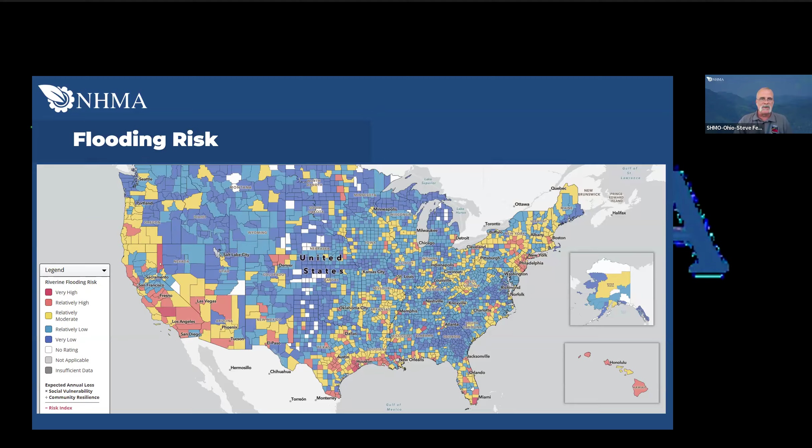Flood risk is a national concern, but varies locally. Every region has some degree of riverine flood risk, though the severity differs by county. And even moderate or low risk areas are not risk free. There's a statistic that people familiar with the National Flood Insurance Program hear all the time, that 30% of the claims every year come outside of mapped flood hazard areas. So just because you're not mapped in the FEMA floodplain doesn't mean that you're risk free.

Since 1980, we've had over 45 $1 billion inland flooding disasters, and those numbers just keep going up and up every year. What we're trying to do through mitigation is to break that cycle of constant damage repair and damage repair. Sometimes these events can turn very deadly.

Just last July, 4th of July weekend in 2025, we saw the Guadalupe River in Texas rise up 40 feet in a few hours, and unfortunately claimed the lives of a number of campers at Camp Mystic campground there. So flooding can be deadly and the consequences can be great.

Frequency and magnitude. Extreme rainfall is increasing, and I kind of feel silly saying this right now because in the state of Ohio, we've just endured two weeks of solid rain. Our emergency operations center is activated right now. We had flooding in my neighborhood last night. So you don't need a lot of convincing for me that extreme rainfall is increasing.

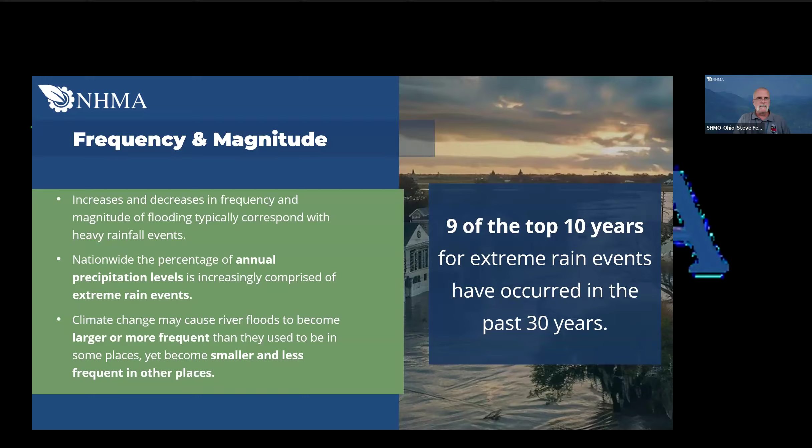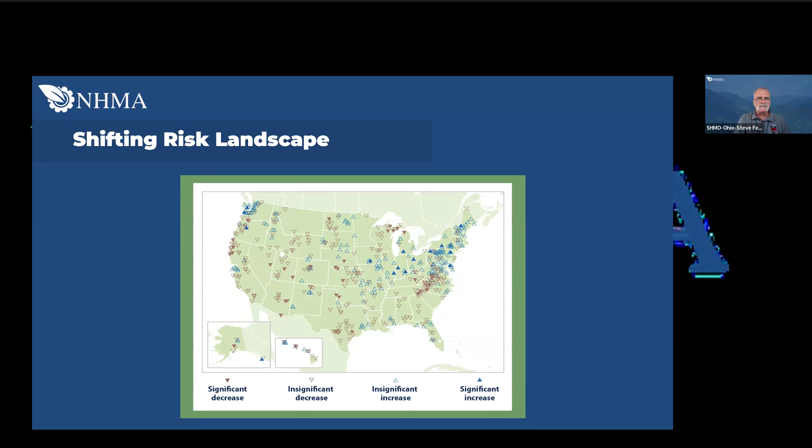So some key terms and concepts that we need to know as we move forward and talk about the NFIP and flooding related issues, and how that builds into an eventual mitigation project.

So what exactly is riverine flooding? Flooding occurs when runoff from heavy rain, snowmelt, or rain on snow exceeds a stream's channel capacity, overtopping the banks of the floodplain. The timing of flooding is going to vary by basin size. Flashy or small streams can respond within hours, whereas large rivers may take days or even weeks to crest. Depth, velocity, and duration control the severity of impacts and the appropriate mitigation options.

So what are some of the causes of flooding? Well, rainfall, right? That's one.

But there are others, snowmelt for instance. Our friends out west have a lot of mountains, and they get a lot of snowpack in the winter. That comes when it starts to melt in the spring. Add a little bit of rain on top of that, and you've got problems. Same with the Midwest. Some of our largest floods in the state of Ohio happen in the spring when we have frozen ground and a solid snowpack, and then we get rain on top of that. It's a sure recipe for problems.

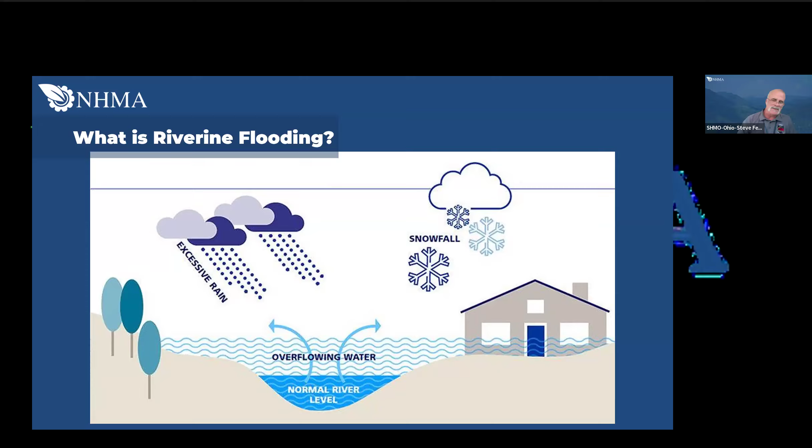But you know, things that people always think of—severe thunderstorms, hurricanes, tropical storms—all of those things can lead to serious flood events. Next slide, please.

Some common flooding terms. We'll start with floodplain. Floodplain is any land area that can be inundated by floodwater. This usually includes the river channel and the broad low-lying areas next to it.

Floodway, when you talk about FEMA flood mapping, is the area usually adjacent to the stream, where you can have the fastest moving floodwaters and the highest potential for debris and projectiles. So it's often the most dangerous part of the floodplain, and development there is restricted with minimum NFIP requirements.

Discharge is the volume of water flowing in a river per unit of time, typically expressed in cubic feet per second. A higher discharge means there's more water coming down the stream. River flood severity is often described by both stage, which is height, and discharge, which is the flow rate.

Hydrograph is a graph of river stage or flow over time—we've got a slide showing an example of that in a few minutes. It basically shows how a river rises and falls during a flood event, with the horizontal axis being time and the vertical axis being discharge.

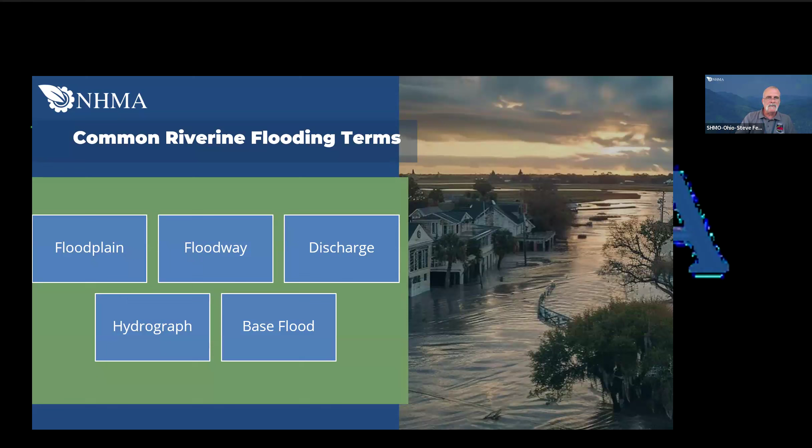Buoyant force is an uplift that can cause a structure to float, to come up off of its foundation and float downstream. Hydrostatic force is a force exerted on a structure from still water—like where you have water on the outside of the house but the inside is dry, which puts a lot of pressure on those walls and can cause walls to collapse and fall in.

Hydrodynamic force is a force from the water flowing by a structure, which can cause scour and push on walls. That's the type of force you're going to have in that floodway area, the area closest to your stream. Debris impacts also occur there because it's the fastest moving water, so you get the highest potential for floating trees, vehicles, and manufactured homes underneath bridges. It's really crazy what water can move and push downstream.

Water damage and contamination: even after floodwaters recede, they are not clean. It's not like the water that comes out of your tap, it's got gross things in it. If you leave that uncleaned, it's going to cause long-term problems like mold and other issues.

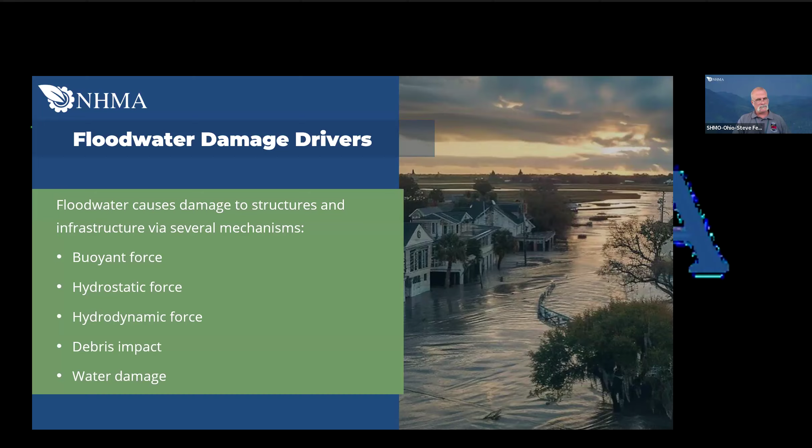The next stage is minor flooding. There, the river is out of its banks, usually affecting low-lying areas near the river—crops, parks, things that, if flooded especially for a short term, aren't hugely detrimental, but are still, by definition, a flood nonetheless.

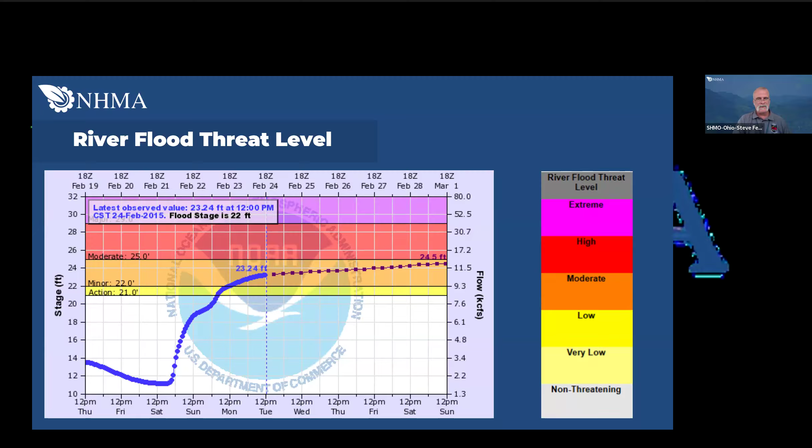Let's talk about the National Flood Insurance Program. It was established by Congress in 1968 to address the continual cycle of flooding. Insurance companies didn't want to take on the risk of providing flood insurance, because if your pool of coverage is in a certain area and that entire area gets flooded, you'd go out of business. So the federal government stepped in and created the NFIP.

The NFIP in a nutshell: the community agrees to adopt and enforce floodplain management regulations, and in return the federal government makes flood insurance available to anyone in the community who wishes to purchase it.

New development is supposed to be permitted through the local floodplain management office and comply with the minimum standards of the NFIP, usually meaning the lowest floor of the structure is built above the flood level. As older structures get flooded and substantially damaged, they were supposed to be brought into compliance as the program continued through the years.

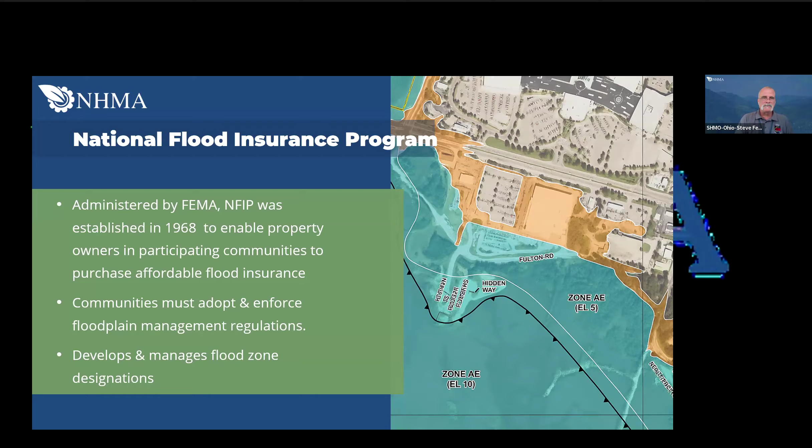The main tool the NFIP uses to identify areas where local floodplain regulations apply is the FIRM, the Flood Insurance Rate Map. It's the official map of a community, defining both the special flood hazard area and the flood zones applicable to that community. The map is used by the NFIP for floodplain management, mitigation, and insurance purposes, and it's the official source for determining flood risk within the community for NFIP enforcement purposes.

The term special flood hazard area is synonymous with the blue area on the map, which is the A or AE zone. Any zone on a FIRM that begins with A is a 100-year flood zone, or V in coastal areas.

Don't ask me why they picked V instead of C, but it's a V zone if you're in a coastal area. I think because the old maps actually had a zone C, but again, I'm not going to let Tom make more old jokes about me, so I won't get into that.

The key takeaway here is that the FIRMs define where the special flood hazard area is and the BFE that must be designed to when developing HMA project applications. In recent years, FEMA has required that HMA projects be designed to comply with ASCE 24 criteria, which includes freeboard and other standards more stringent than the minimum NFIP requirements.

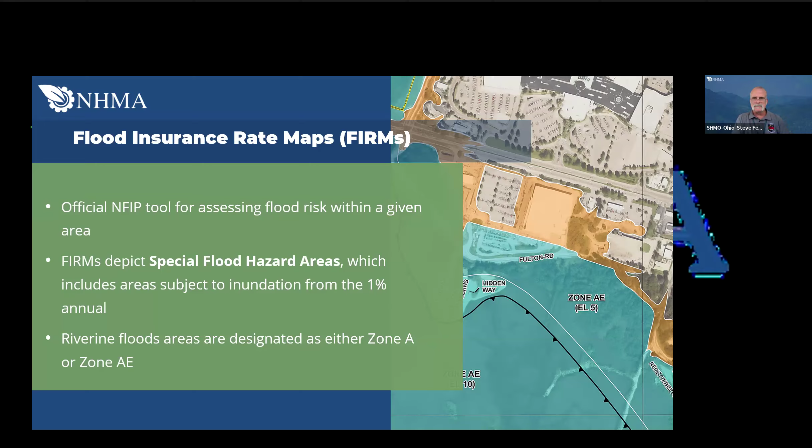Next slide, please. Assessing, all right, go ahead Tom. Yeah, go ahead, I think this is where it starts, Steve. Or no? You can, oh go ahead. Keep driving it. Okay. Time check. All right, next slide. I think we're a little bit behind schedule, so we'll move a little faster if we can. I can move it right along. Sure can.

Okay, so elements of riverine flood risk. Three major terms here: hazard, basically what can happen and how often and intense is it going to be. Exposure is all about who and what is in harm's way. And vulnerability is how bad is it likely to get, or how bad are things going to go.

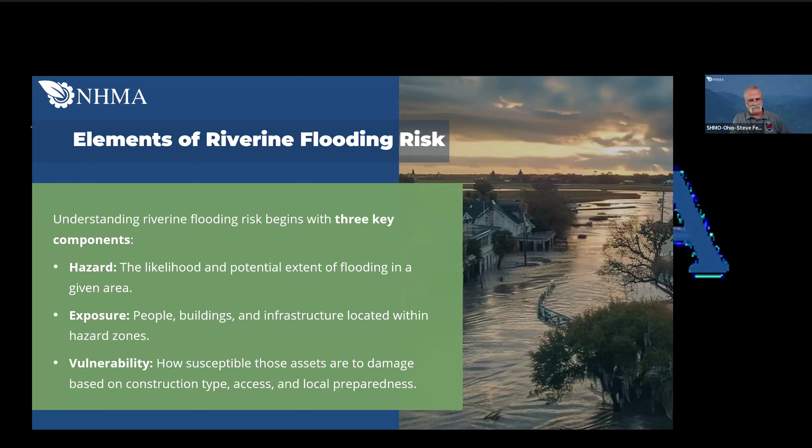When you take a full look at the riverine flood hazard, you're going to be looking at a number of things. It's not just how much rain fell and how quickly and where it fell, but what are the parameters of your watershed? Is this a small watershed with steep valleys that's going to flash flood? Is this a large flat watershed that's going to take time for the river to rise? Is it a fully urbanized area, again more flashy type flooding? Or is it a large agricultural area with a lot of wetlands? It's going to be slow. The watershed's ability to absorb water, the obstructions along the water course, how many bridges, culverts, crossings do you have? All of those things are going to contribute to the extent and magnitude of the flooding.

So exposure: who or what might be impacted? Well, again, we talked about populations. Clearly, flooding impacts residential structures, businesses, critical facilities, wastewater and water treatment plants, electric. The first priority after a major event is to get that power back on because that's going to drive your recovery. Infrastructure, how many roads and bridges were impacted in a particular event? So mapping those using GIS, if possible, is really critical because exposure mapping turns where flooding is expected into what, who, and what must we protect first.

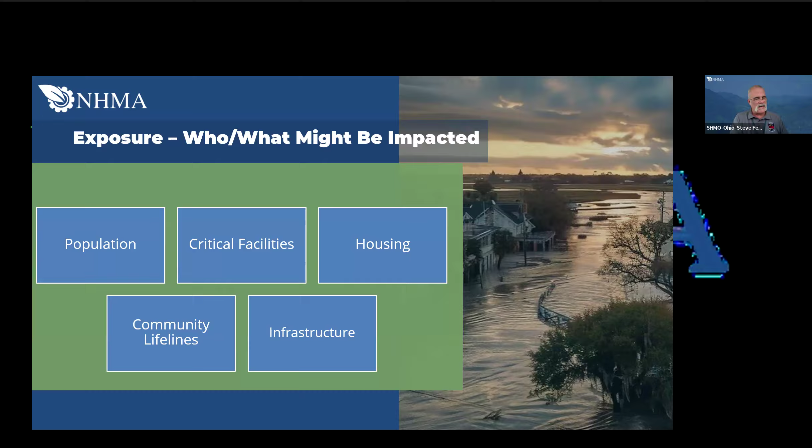Next slide. Okay, we're a little bit behind, so I'm going to jump to my last slide here, Tom. And what I want to...

Tom, I'm going to turn it over to you. Thanks, Steve. Yeah, I can't stress enough the same for the hazard mitigation plans—you can't get into the game unless you have the hazard mitigation plans current, with actual mitigation actions identified, particularly in this case for riverine type projects. So I'm going to be talking about that on the next following slides.

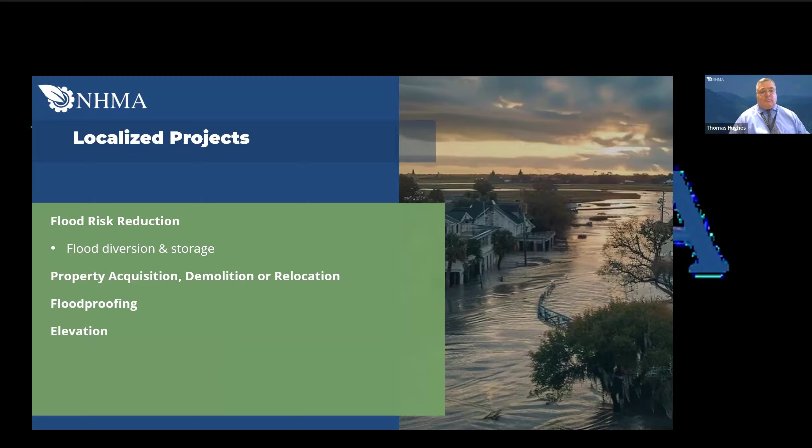As far as flood diversion and storage, I want to point out the bypass and diversion channels and temporary or permanent storage areas, channel basins, reconnection to floodplain and wetlands, and reduction of river stages and peaks. This definition is important: projects that redirect floodwater or temporarily store it to alleviate downstream flooding. This includes constructing or enlarging detention basins, dry ponds, or overflow channels, as well as creating diversion canals or overflow corridors that channel excess river water into designated storage areas like wetlands or fields.

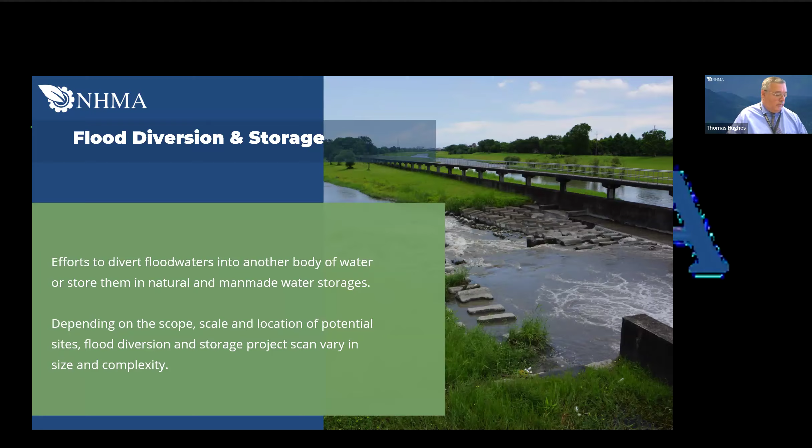Why is this relevant to riverine flooding? By giving floodwaters a place to go, these measures lower the peak flows and water levels in rivers and streams during storm events. Diversion and storage reduce stress on downstream channels and levees, protecting communities by cutting off the flood peak. Diversion and storage can measurably lower flood peaks when properly sited, modeled, and operated.

Property acquisition, demolition, or relocation—I would also add that we need to look at elevation, which I'll talk about later, and mitigation reconstruction. We have a slide on elevation coming up. This is the permanent removal of flood-prone properties by purchasing the property from willing owners and clearing its structures.

In a property acquisition, structures are torn down and the land is converted to open space, often a community green space or natural floodplain in perpetuity, which can be troubling for some communities because we've used FEMA dollars, state dollars, and other non-federal share to cost share for that parcel. There are only certain things that property can be used for due to deed restrictions. But again, this type usually gets your risk down to near zero, if not zero.

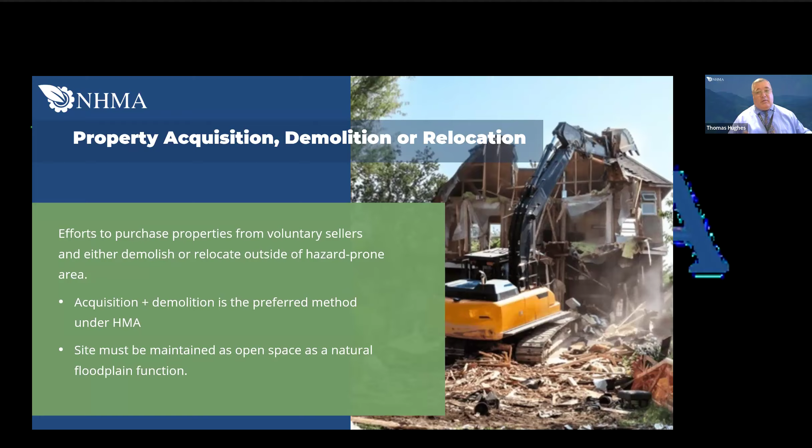Floodproofing—we're seeing this used particularly with businesses and historic structures. We could have floodproofing that's dry versus wet, or even a combo. Dry floodproofing could be impermeable walls, shields at openings, anchored equipment, seepage control, or sump pumps. Wet floodproofing consists of the use of flood damage resistant materials and construction techniques to minimize flood damage to areas below the flood protection level of a structure.

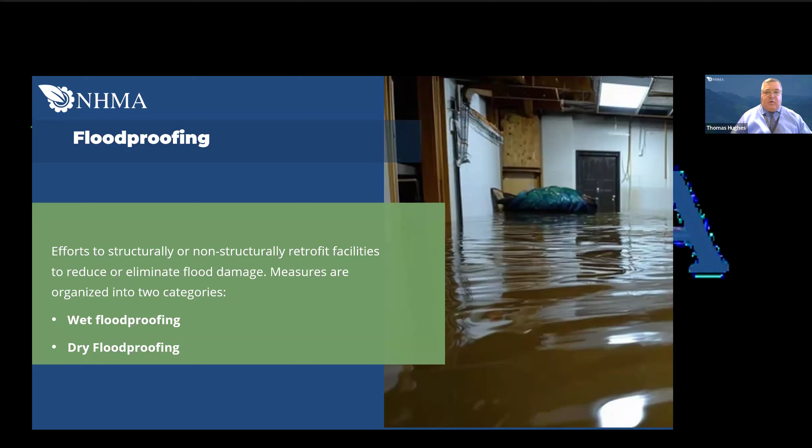This is relevant to riverine flooding because floodproofing can protect structures in floodplain areas where moving or elevating them isn't feasible—it's like a flood fight where the structure is. I've seen it in schools too, where we've done a combo of dry and wet floodproofing, and for critical facilities. One of my favorite projects was working with the Corps in the Pittsburgh district and Etna Borough, where they were close to the river. They did dry floodproofing for openings and the steps leading into the critical facility, but also mucking out—they were able to use some materials there for wet floodproofing.

Structural elevations—communities need to look at not just elevating structures like in this picture, but also mitigation reconstruction, where within that same footprint you build a code compliant house. We affectionately call it demo rebuild instead of mitigation reconstruction. That's not a technical term, but as I explain it to locals, it's a lot easier for them to understand.

For elevation, we need to raise the existing building so its lowest floor is above the flood level that Steve had talked about, the base flood elevation. The structure is lifted and placed on a higher foundation—extended foundation walls, piers, posts, columns, or fill—while ensuring it remains stable and properly anchored, and all utilities and service equipment, like HVAC and electrical, are also elevated.

This is a code compliant structure, but it's got to be monitored. And the number one thing from an operational side is folks with an elevated structure think that code and that elevation is for them as well. It's not. It's for the structure.

When we in emergency management tell folks to leave, it's time to leave. It doesn't mean you're going to ride this one out in an elevated structure, because we all know things can happen where the elevation can happen at a higher rate.

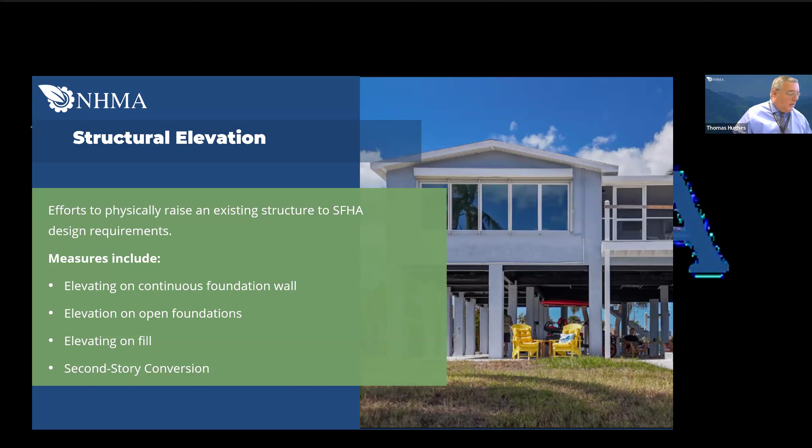Then non-localized reduction measures. These are actions or projects that lessen the frequency and severity of flooding and decrease predicted flood damage within an area hydrologically linked to a drainage basin that is regional in scale. These non-localized project groups, systems, or options are dams, levees, and restoration. Each affects risk over a broader footprint than, say, a parcel.

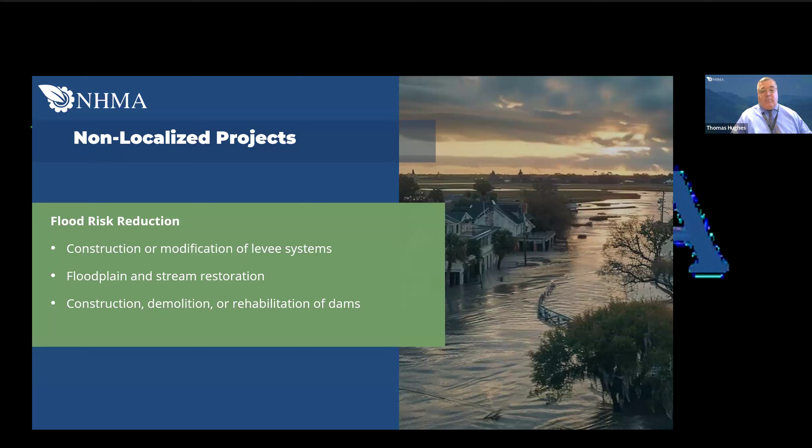Levee infrastructure enhancements - we're seeing that a number of levees and dams were built back in the 40s, 50s, 60s to the engineering needed for those events. These designs were good then, but not good now, and we need to look at enhancements such as construction or improvement of earthen embankments and flood walls, and enhancements of other levee systems including gates, pipes, and pump stations. There are other funding streams that can be used for that.

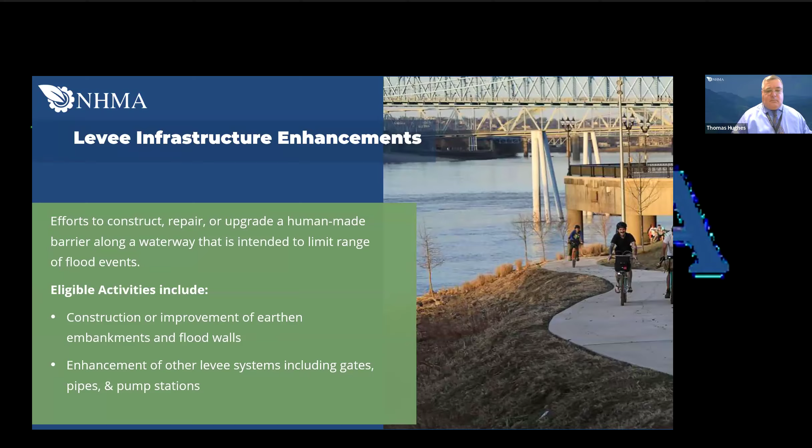Floodplain and stream restoration. Yes, one - time check at 12:36, just letting you know. Okay.

With floodplain and stream restorations, for green infrastructure and natural solutions, these are things many states are now looking at, or looking at a combo - floodplain setbacks, channeling, in-stream structures, vegetation seeding, riparian buffers, and that.

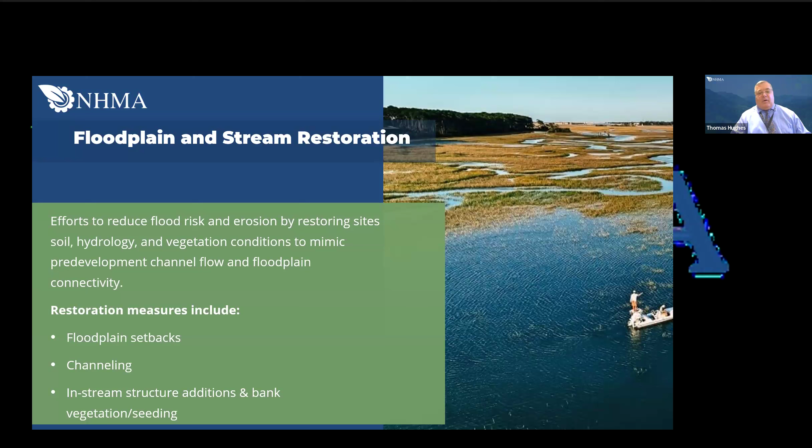Dam construction and retrofits - we're seeing that under the rehabilitation of high hazard potential dams. Here are some of the items you can do for those dams that need assistance in meeting current needs.

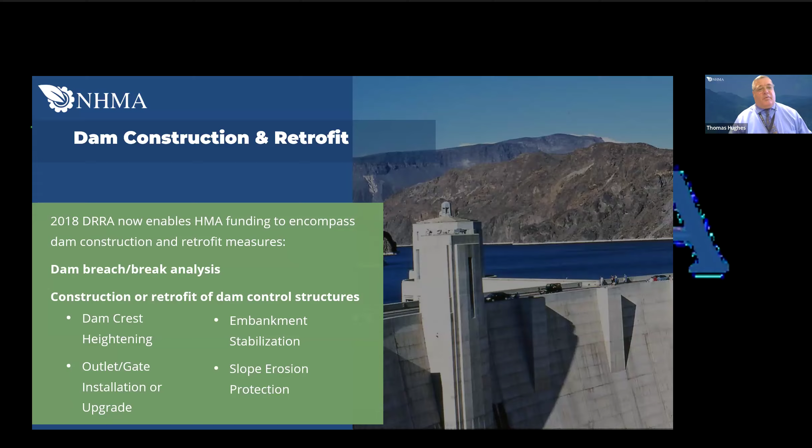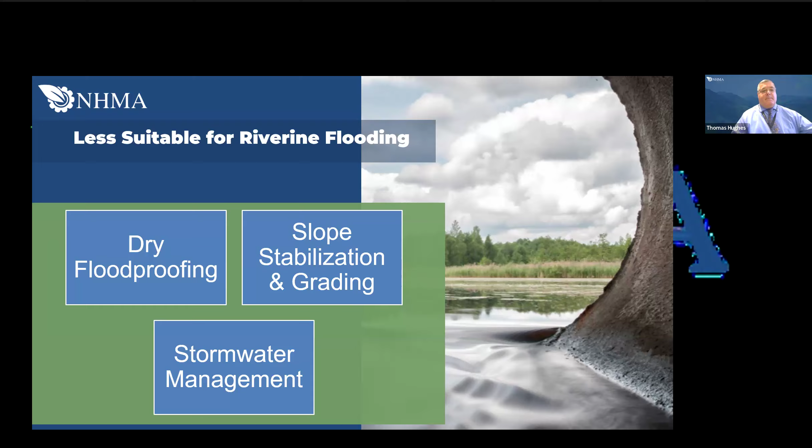Ineligible projects, of course, include dredging and debris removal - we're seeing that even in the last events we've had in our state. Also projects in which other federal agencies have authority, except when the DRRA comes into effect, and FMA only non-localized projects.

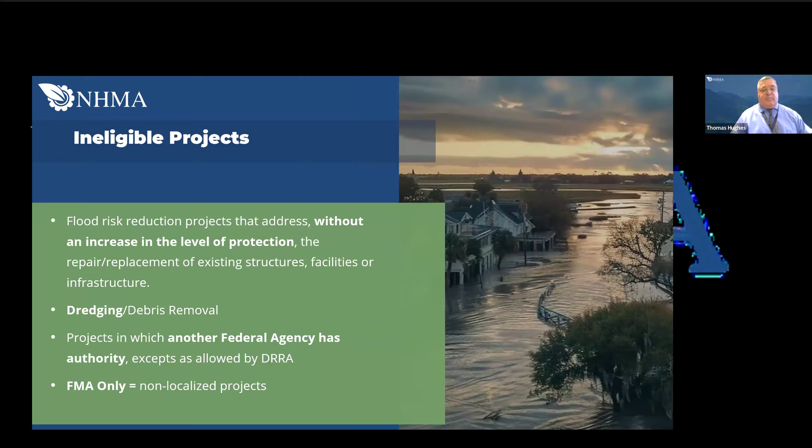And just FEMA funding streams - there's a number of those. They play a major component, but they're not the only show in town, though they do allow for a wide variety of projects. When I go out on the road, I usually show two slides of where they were and what FEMA now will fund, and it's night and day.

So you need to identify programs for riverine mitigation funding. Each program has its own eligibility requirements. The disaster hazard mitigation grant program can be used for funding riverine flooding mitigation, but it has to have a disaster declaration, it needs to be in the plan, and the community has to actually participate in the plan, as with all hazard mitigation assistance.

The other game changer is the use of PA Mitigation 406 public assistance dollars - not in the mitigation house, but can help us in the mitigation house. I like spending public assistance money because then I actually see more money come to us through the hazard mitigation assistance program.

Okay, key elements - going over quickly, application development here. These are the things we need to make sure the sub-application has: mitigation actions that address specific risk, clear design and scope, accurate and defensible cost estimates, key data for H&H studies, and demonstrated cost effectiveness.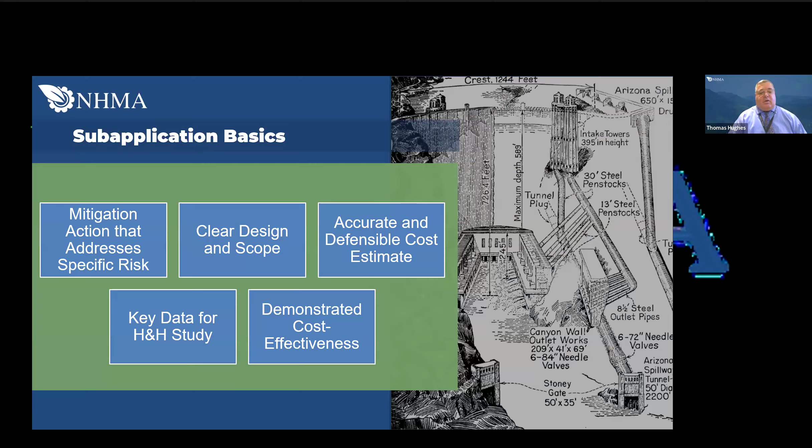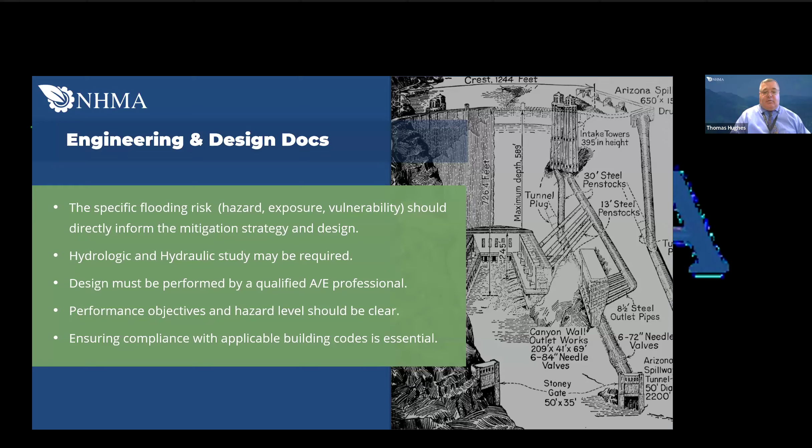For the engineering design, will this address the specific flooding risk - will it work as designed? The hazard exposure vulnerability needs to be addressed. Hydraulic studies will be required for many of these projects, and we need design professionals to actually do that - we want their stamp. Performance objectives and hazards should be clear, ensuring compliance with applicable building codes - finding out what your state code is and what the local code is.

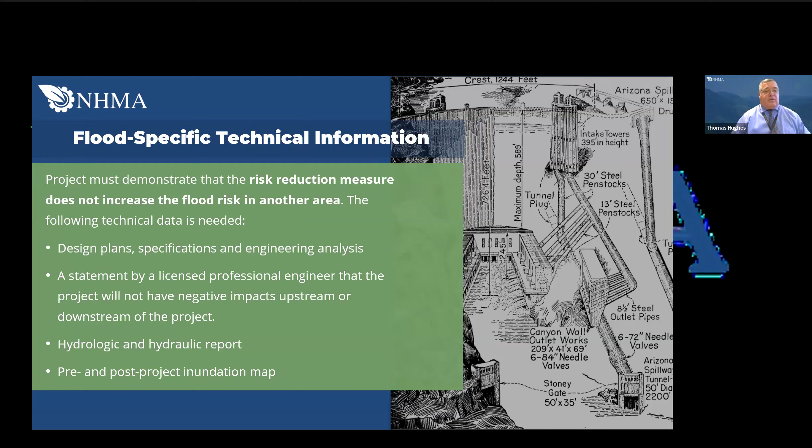Flood specific technical stuff—FEMA puts out some technical bulletins that I found to be very useful. There's also a lot of ASCE, American Society of Civil Engineers publications out there. The H&H report I talked about is very effective and needs to support the application. And then pre and post project inundation maps.

Costing and budget—if you've delved into the FEMA grant outcomes platform, we need to make sure we have good costing and budgeting in there so we don't get requests for information from FEMA later on. Don't use lump sum; only use that as a last resort, because FEMA will come down on you for that. They want specifics on how you came up with that cost. Riverine mitigation may require specific technical elements, and accounting for the cost is very critical.

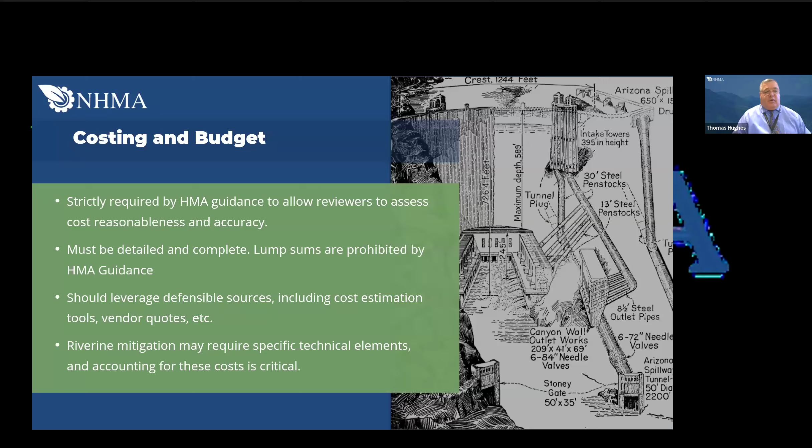Also be aware of pre-award costs that might be eligible. Ask your state hazard mitigation officer or project officer if you can use that.

And then we want to see—hey, they give you the money, are you committed to following this through? They want to see an operation and maintenance plan and a clear commitment by the applicant accepting responsibility, knowing that they have that O&M cost later.

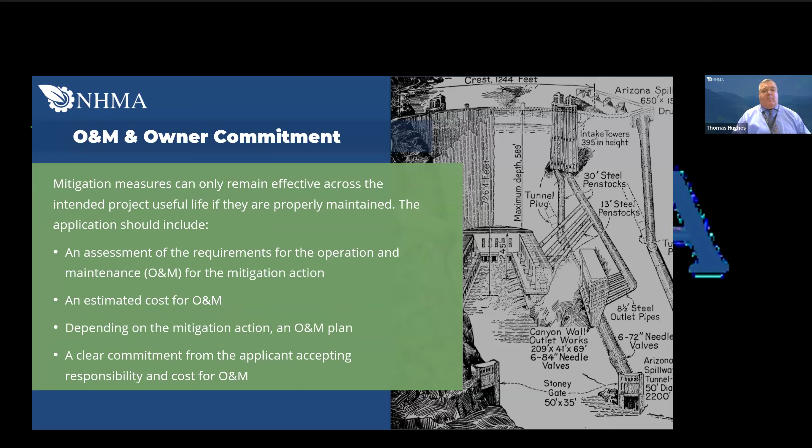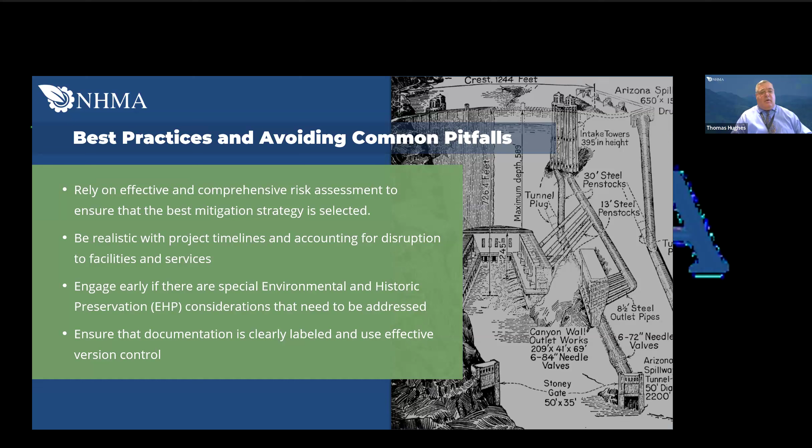Rely on effective and comprehensive risk assessments. Be realistic with timelines—we've seen that in the schedules. If you think you're going to do an infrastructure project in 12 months, unless you have a shovel-ready project, you're fooling yourself. Engage early and often, and ensure documentation is clearly labeled with effective version control when you send that off to FEMA.

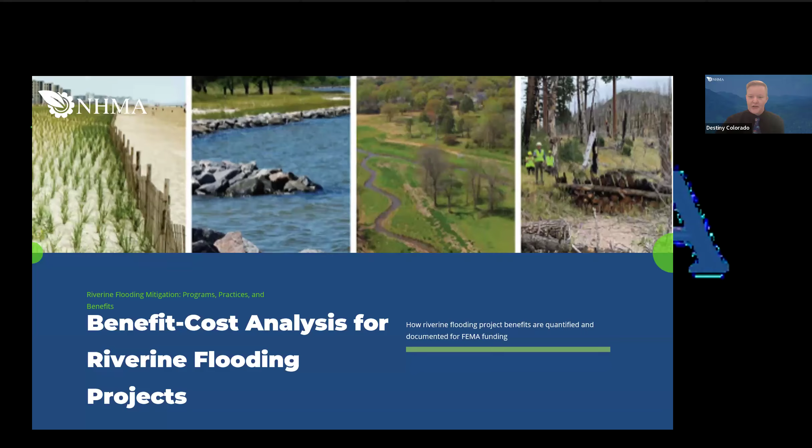Thank you so much. So for our benefit cost analysis, some of the items that folks really struggle with is trying to meet that benefit cost ratio of greater than 1.0. Realistically, when it comes to our benefit cost analysis and justifying the amount we're going to spend on these projects, we want to show a benefit greater than that cost.

One of the biggest items to keep in mind is whether the data and information we're putting into our benefit cost analysis is repeatable. At FEMA's level, when they go through your benefit cost analysis, they are going to replicate it to ensure that the BCR that comes out is the same or very similar.

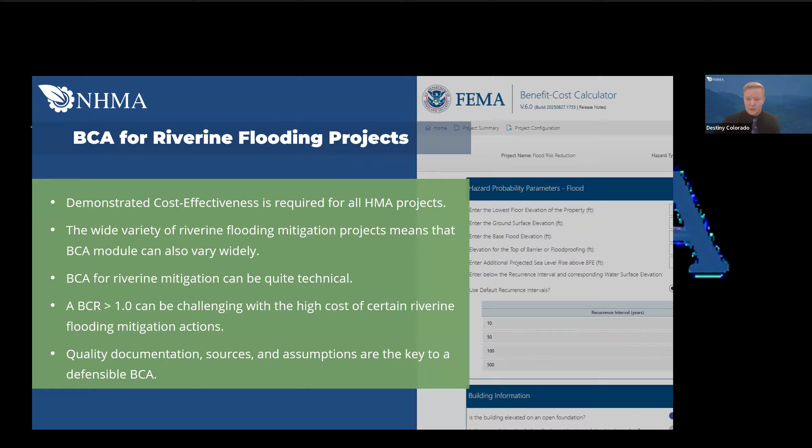One of the key components is ensuring you have accurate documentation to represent what you're trying to say in your benefit cost analysis. Make sure you're actually calculating the various benefits, such as structural losses, loss of life, as well as different secondary benefits like displacement costs and downtime, ensuring all the benefit cost streams are taken into account. A lot of times we look very specifically at structural loss and decline to use additional benefits, so ensure those benefit streams are accurately documented within the analysis.

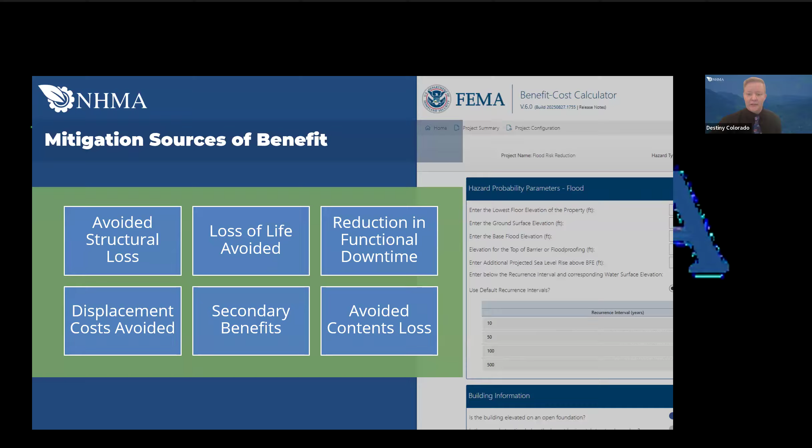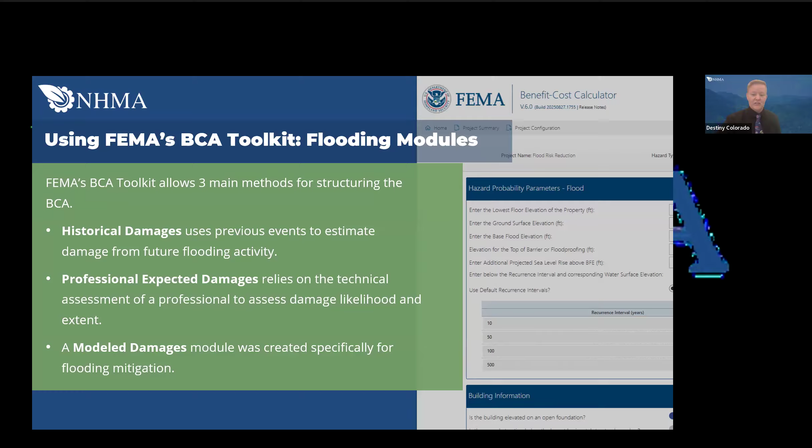Within the toolkit, there are three main methods we can use to show different damages. First, historic damages—often you can pull this from your public works or public assistance folks. Second, professional expected damages, which are generally more expensive to gain access to, involving a lot of technical assessments. Third, modeled damages—that module was created specifically for flood mitigation, and it's generally a better option for the cost of displaying those data points. Just ensure when using a benefit cost analysis format that you have a reproducible package with the various data assumptions and exports.

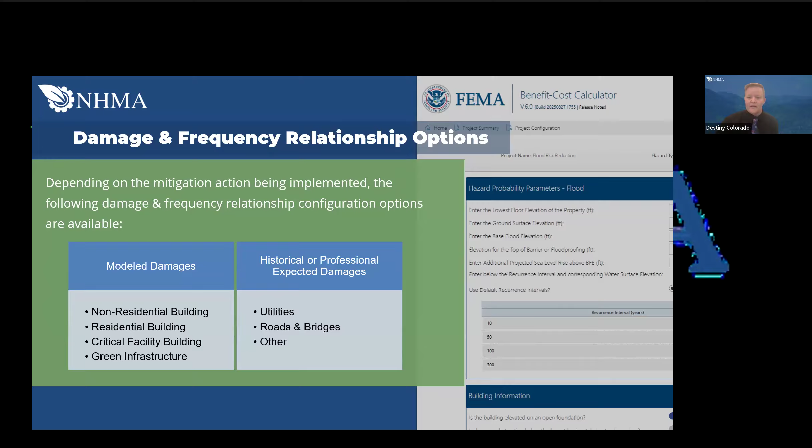When we're talking about damage frequency and the options available, for utilities and roads we want to use historic or professional expected damages. You can definitely use modeled damages for residential buildings and critical facilities, and ensure green infrastructure is accounted for.

When it comes to our modeled damages for riverine projects, a lot of this data can be found in your H&H studies. If you do not have H&H studies, I would highly recommend that you have those to ensure that you are informing your BCA data. Ensure that you are visiting some of FEMA's websites, such as the Map Service Center, to pull some of the flood insurance rate maps.

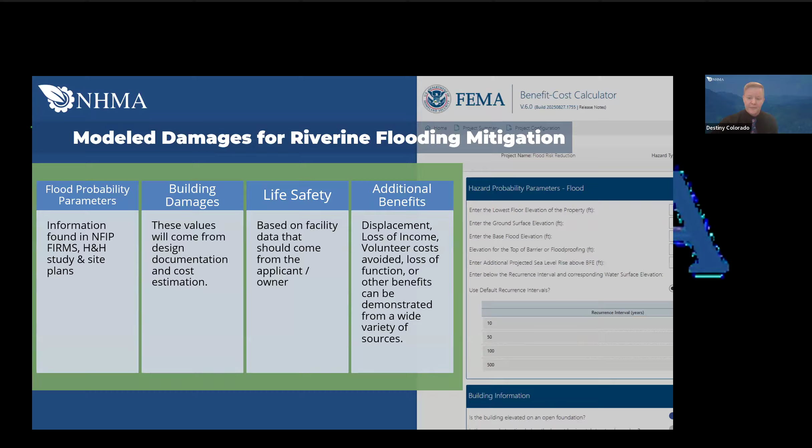And then some of those design documents can also help drive the building damages. When it comes to life safety, that should ultimately be coming from the applicant and owner. And then those additional benefits, such as the displacement and volunteer costs, loss of income, those can come from some of the historic documents that you have.

Again, for the data sourcing on the benefit cost analysis, make sure that you're using those flood insurance rate maps and the flood insurance studies. We want to ensure that we're actually using professional documentation. If you're pulling data from non-reputable sources, your benefit cost analysis has a strong likelihood to be kicked back for additional requests for information. You want to ensure that you're using publicly available data and maps throughout that process.

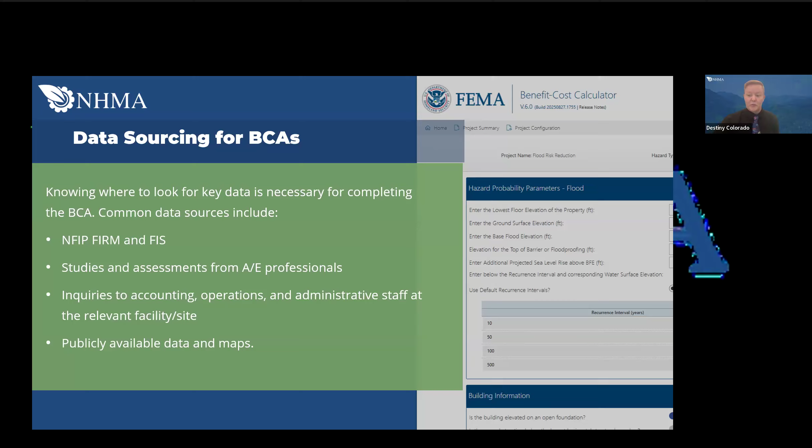A more robust BCA will use a combination of those reputable sources as well as professional inputs.

Now, when we talk about the various resources and tools that are available to you, we're going to talk a little bit about our Hazard Mitigation Assistance Guide. So that's our focal starting point.

Now, the benefit cost analysis toolkit that FEMA offers is within Excel, easily accessible to most entities. And then we also want to ensure that we're reviewing the notice of funding opportunities for whatever grant that we are applying for. Additional guidance can be provided by your state, territorial, or tribal entity on specific guidance and barriers that have been seen in the past and best practices moving forward.

So when you're going down the list of checks and balances, I would start with that notice of funding opportunity, see what the minimum requirements are to apply for additional funding under different mitigation efforts, and then make sure that you're using the Hazard Mitigation Assistance Guide to ensure you're meeting the minimum requirements for FEMA hazard mitigation programs. And then for that benefit cost analysis, you really want to make sure that your benefit cost ratio is over 1.0.

So there are key publications that FEMA has put out that would be key components to consider when you're going through each of your potential options for riverine flooding. So we have floodproofing for non-residential buildings as well as a guide for homeowners for retrofitting. There's a guide that goes over elevating flood-prone homes, and then we also have various safety guides as well as job aids.

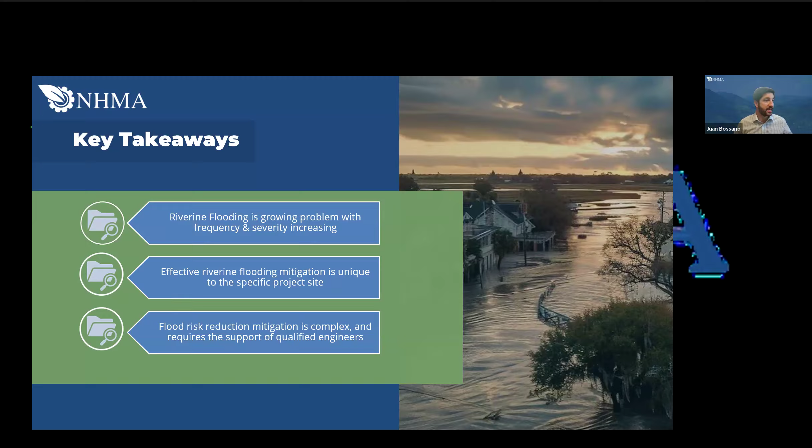And with that, we can go to the next slide, and we can do a little bit of Q&A if anyone has any questions.

I think we got a few questions that we answered in the box. Maggie, specifically, thank you for bringing that forward about the erosion question. We are constantly looking for additional important aspects to add to these modules, so we're very eager to add a section on that, maybe even to this training module, or even do a separate training module on that. Much appreciated, we really like the feedback overall. It's really helpful for us, so that we can improve our portfolio of trainings.